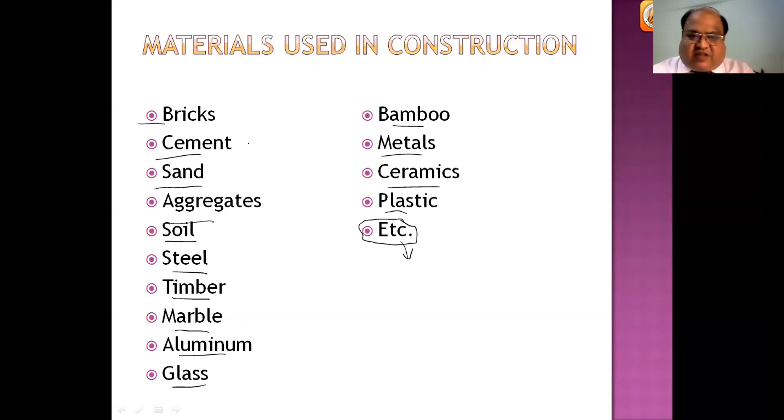So you can see, if I talk about these general building materials, they have certain properties which they should have. Like they should have good mechanical properties, physical properties, mechanical properties, such as strength and hardness.

Elasticity, plasticity, ductility, brittleness. Now, brittleness and ductility are two different properties, but in certain places you require ductility, and in certain places brittleness is important. So also stiffness, flexibility, toughness.

Vibration resistance. So these are the list of properties that should be there in materials, but not all materials have all properties. Certain physical properties are density, bulk density, density index, specific weight, specific gravity, true or absolute specific gravity, apparent or mass specific gravity, porosity.

Hygroscopicity, and water permeability. So we are talking about engineering first of all. Civil engineering is dealing not only with buildings, but also with bridges, dams, and other high-rise structures. That's why various types of materials are being used here.

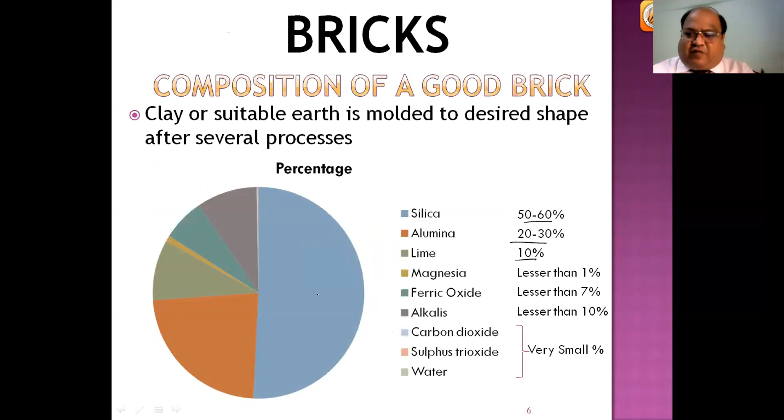If I talk about brick, you can see here the composition of a brick, showing the amount of materials available in it. It depends on how much different types of materials are there in the brick, and brick is also classified into various classes depending on various parameters.

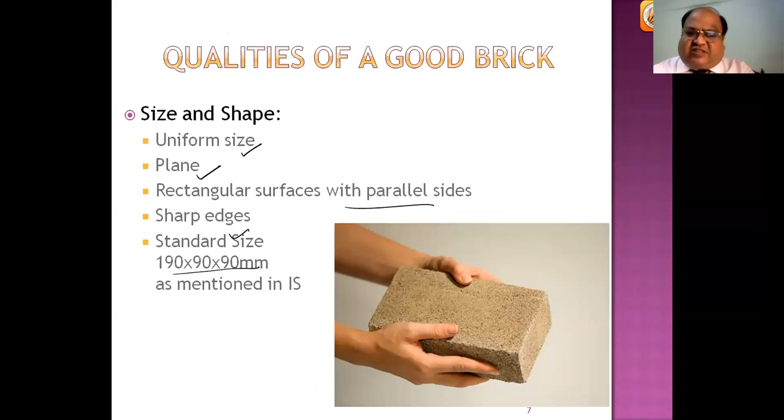A brick should have a uniform size, so it should be plane. It should have rectangular surfaces with parallel sides. It should have sharp edges. It should have a standard size. Generally we use it as per Indian standard code, but in general the size of brick is also different.

So if you see here, these are some general characteristics. When you, as a layperson, go to buy a brick, what will you check? You'll first see the color of the brick - it should be uniform red and/or cherry in color.

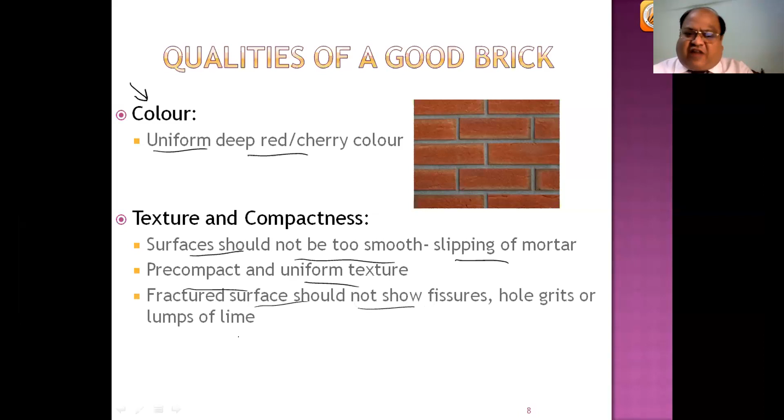Then, what is the texture and compactness of the brick? The surface should not be too smooth or slippery for mortar. It should be compacted with a uniform texture. The fractured surface should not show fissures, holes, grits, or lumps of lime. Okay, so another thing you can test at site is the hardness.

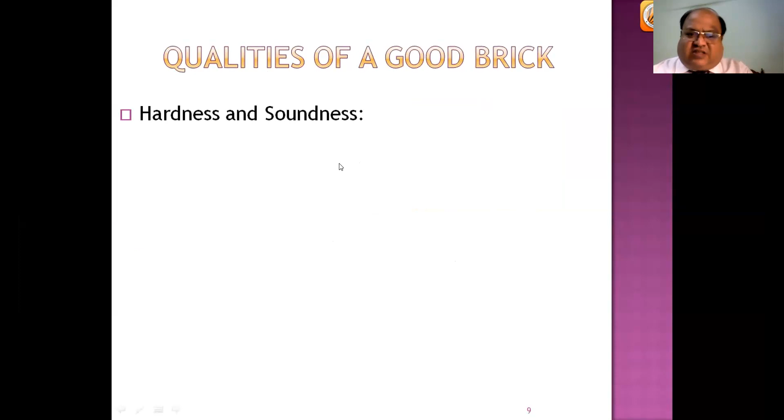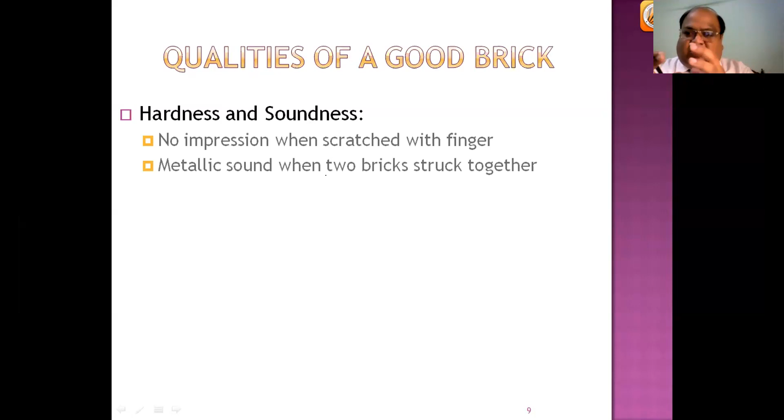You can check the hardness and soundness of the brick. There should be no impression when you scratch your finger over it. So this you can do when you go to buy a brick for your home: take a brick in your hand, see its appearance from outside, and then scratch your finger over the brick. If an impression is coming over the brick, then it is not good. Also, when you strike two bricks together, it should have a metallic sound.

Then what is water absorption? This is not possible for you to check when you go to the mill to buy a brick, so you can do this test at some testing agency. The brick should not take more than 20% of its dry weight in water. Then crushing strength of the brick, it should not be less than 10 Newton per mm square, which we call megapascal. Then brick earth should be free from stones, kankars, organic matter, and other saltpetre. Saltpetre will actually create a white surface over the brick, which is not good.

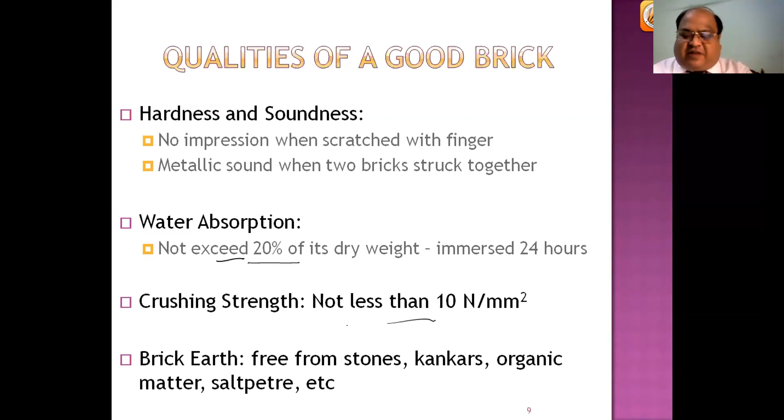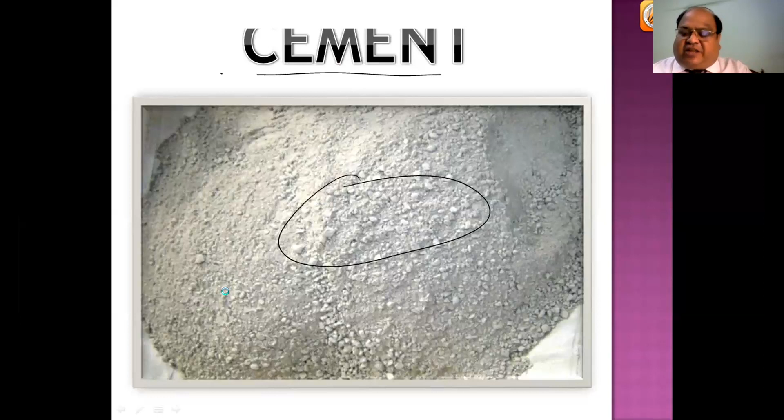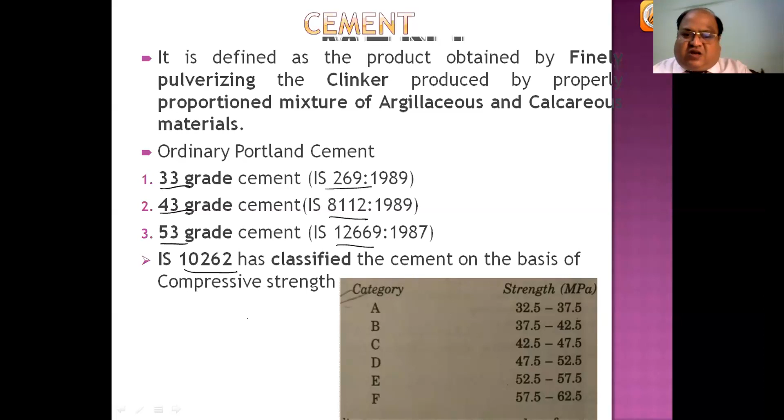So the next material is cement. Cement is grayish in color. You might have seen cement in day-to-day life, but cement has a big engineering behind it. Cement is available in 3 grades in the market. Ordinary Portland cement is there, and pozzolanic Portland cement is also available. There are specific codes by which we design our mix design; we prepare our concrete mix, and cement is also conforming to various IS codes. There are various types of cement.

Civil engineering is a big, vast field - if I talk about cement only, so many types of cement are available. Rapid hardening Portland cement is there. It has high strength and achieves initial strength quickly. Rapid hardening means the structure hardens rapidly so that further work progress can increase. But it depends upon the site and the requirement.

Now we are having low heat cement. This cement is good for mass construction, because when we do concreting, cement reacts with water and a certain heat of hydration is involved. That heat of hydration can be problematic for structures. So for mass constructions like dam construction, we can use low heat cement.

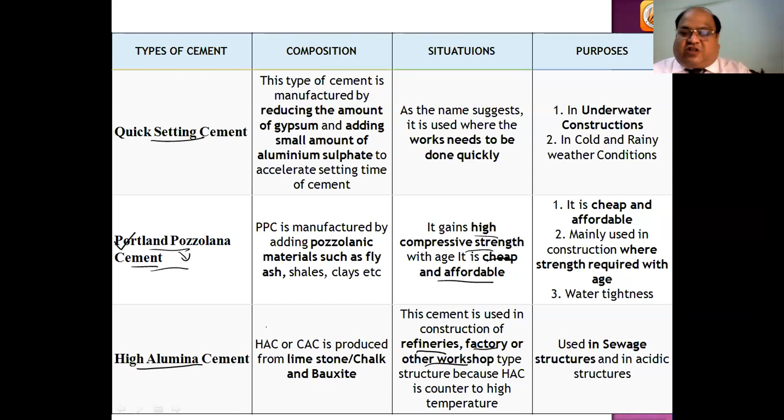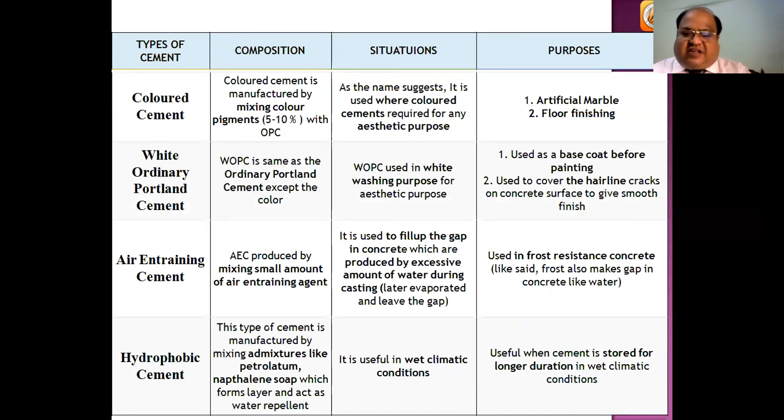There are other types of cement too: colored cement is there, white ordinary Portland cement which you might have used, air entraining cement, hydrophobic cement, and expansive cement. Expansive cement, as its name suggests, expands and increases in volume when it settles.

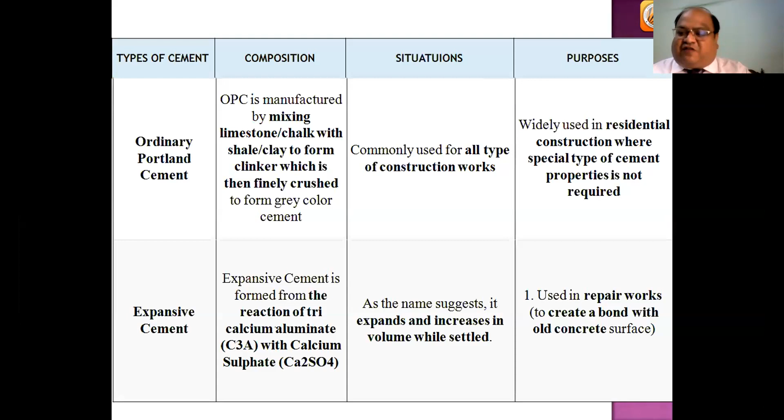For fineness, there is a specific code again. Civil engineering is all dealing with standards. It has standards, specifications, standard processes, standard equipments, which we use to test any material. Like if I'm using cement for testing, we require a specific method to test. We cannot have a contractor testing in one way and another person testing in another way. No, the testing is to be done in a specific process. So our Indian standards, Bureau of Indian Standards, have specified processes as well as standards to test all our materials.

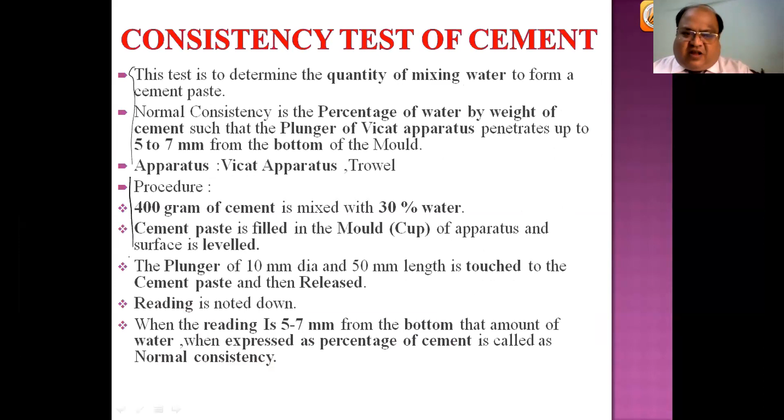These are certain tests which are performed on cement, like the consistency test of cement, and all these processes are given over here as per the Indian standard code.

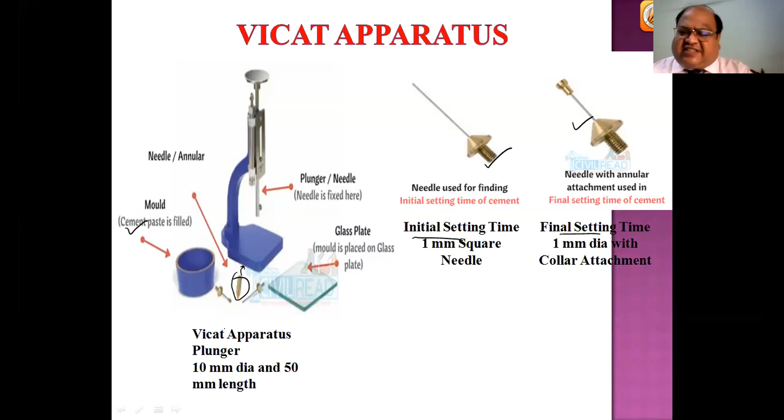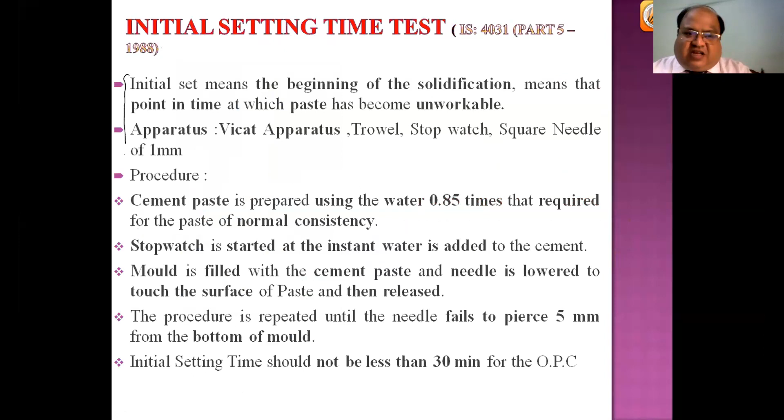Then we use this first plunger needle to check consistency in the cement. Then we use this needle to check initial setting time, and the final needle is used to check final setting time. The next type of test is the process of it. Initial setting time is listed here, final setting time is listed here.

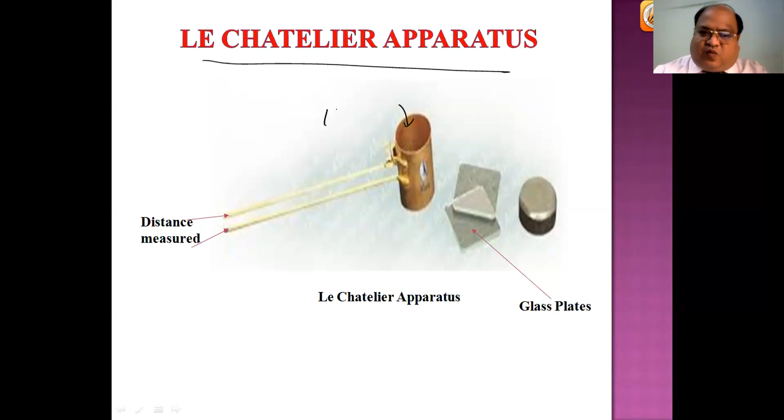Yeah, okay, let us move further. This instrument we use to do the soundness test, where we fill this, and then we put these glass plates up and bottom to it, and then we put this into a water bath, and then it is cured for 1 day. 1 day it is cured, 24 hours, and then when we bring this out, we boil it in boiling water. Before boiling we measure this distance, then after boiling we again measure this distance.

So there will be some expansion. We see the expansion that happened in the cement mold. This gives us an idea of how much cement will expand when it is being heated.

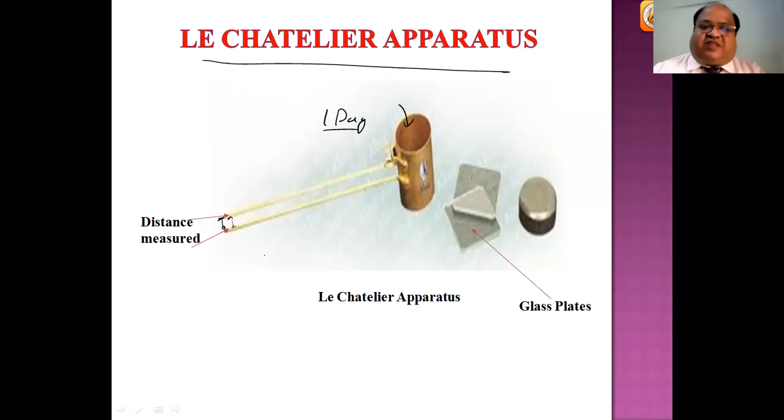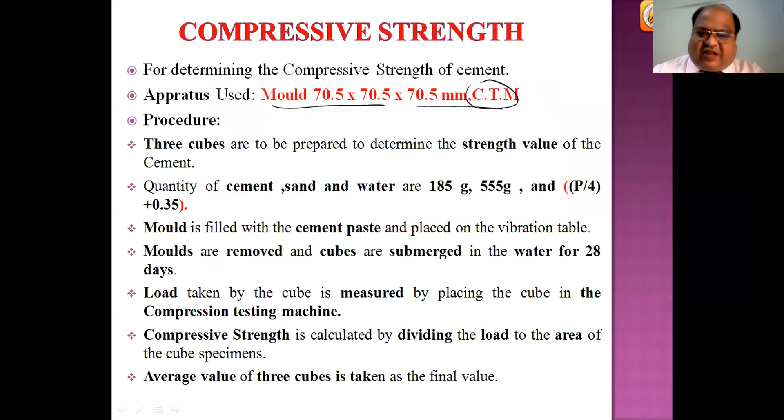So if we talk about concrete, what is concrete? It's a mixture of various materials, but this mixture has full science behind it. So we have to study this concrete in detail in civil engineering, but also we have to study about how and where to place these reinforcements.

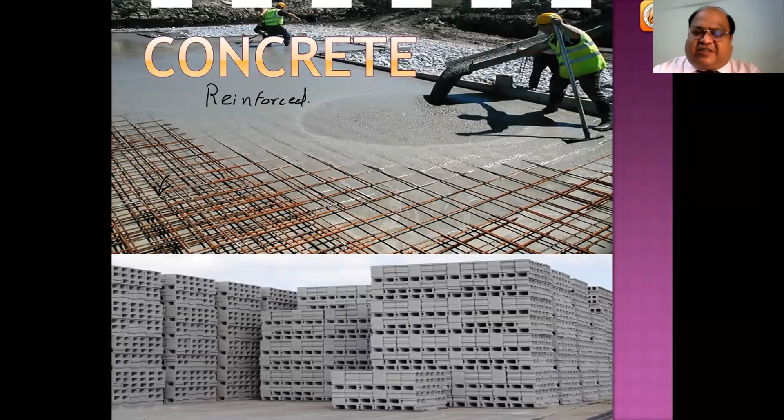If we are placing reinforcement, it is called reinforced concrete. So we have various subjects we study in civil engineering, and we deal with not only reinforced concrete but steel structures also. Let us see what are the different types of concrete first.

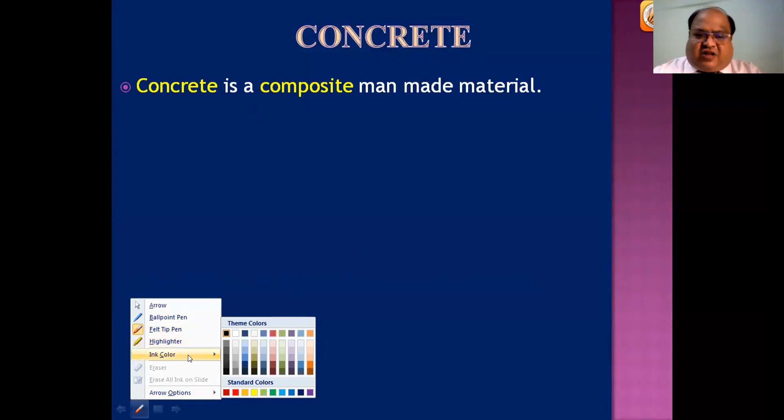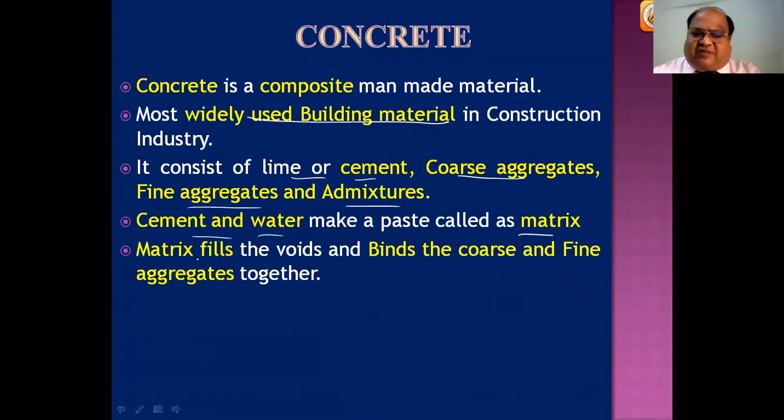What is concrete? Concrete is a composite man-made material. It is the most widely used building material in the construction industry. It consists of lime or cement, coarse aggregates, fine aggregates, and admixtures. Cement and water make a paste which is called matrix. The matrix fills the voids and binds the coarse and fine aggregates together.

Fresh concrete is called wet or green concrete. After setting and hardening, it is called hardened concrete. So you can see a big list of types of concrete here. Normal concrete we use generally, plain ordinary concrete, where no reinforcements are there.

Then your reinforced concrete, which we use in our houses, pre-stressed concrete, a very interesting one. If you have seen bridges being created nowadays, concrete bridges, they used pre-stressed concrete over there. Precast concrete members they bring in, and I can give you a very good example of precast concrete: a 30-story building was created within 13 days, and that's a world record, in China.

Lightweight concrete is also there, high density concrete, air entrained concrete, ready mix concrete, polymer concrete, high strength concrete.

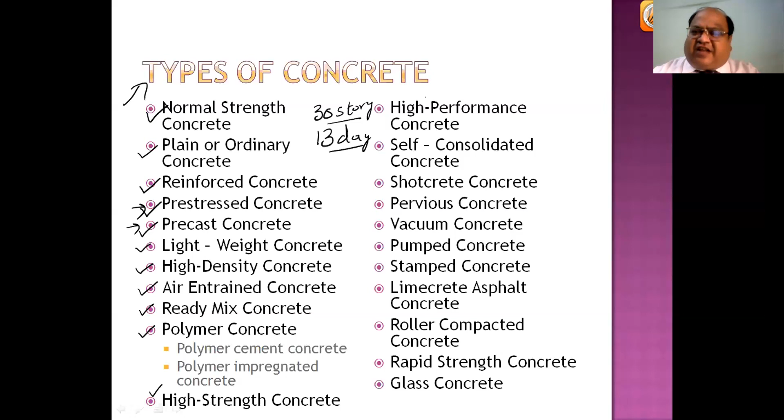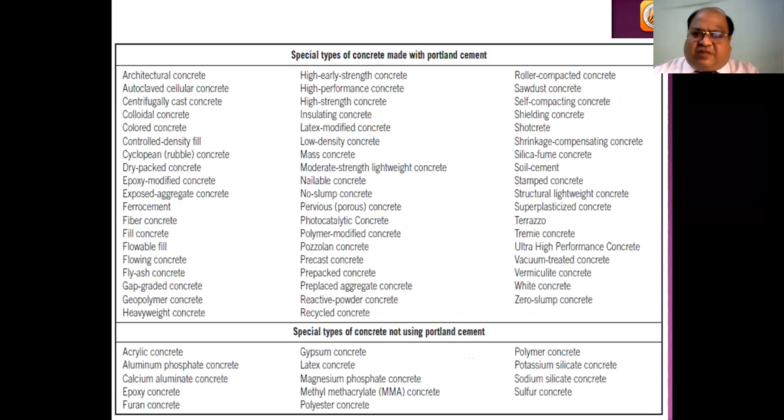By names, I think, you will not be able to understand better, so I have some pictures to show you today. These are many types of concrete which are being used, using Portland cement, and then without using Portland cement also concrete is there. So let me show you certain pictures.

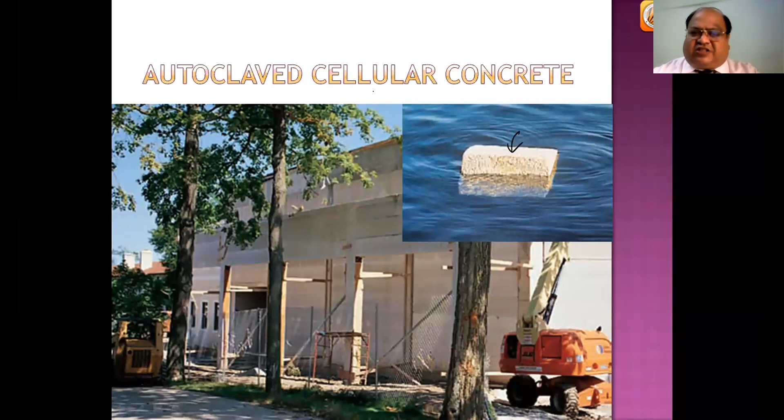You can see here structural lightweight aggregate concrete, where these type of specific aggregates, called LECA aggregates, are used to create this concrete. It is light in weight, and you can see a block of concrete floating over water. So in places where tsunami or flood problems are there, we can use this lightweight concrete. It's also named autoclaved cellular concrete, and it can float over water.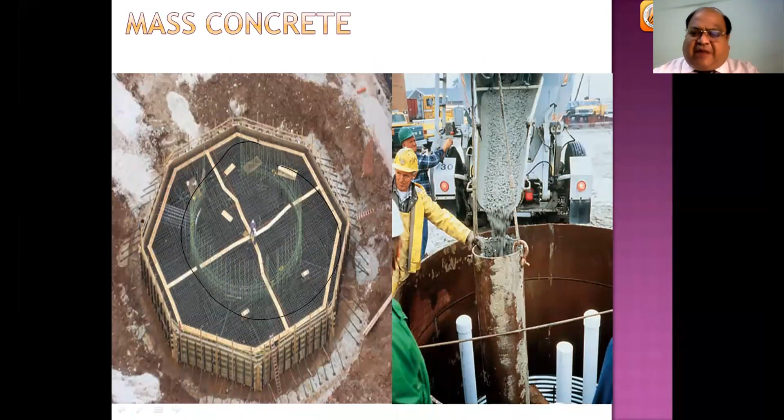This is mass concreting. You can see a big foundation here, it's a chimney foundation, and mass concreting is done by this tremie pipe. We use tremie pipes for pile foundations.

Then we are having roller compacted concrete. Below, this concrete is being rolled by the roller, so it is called roller compacted concrete. It's having very less workability, less water, and we can roll it to create a pavement.

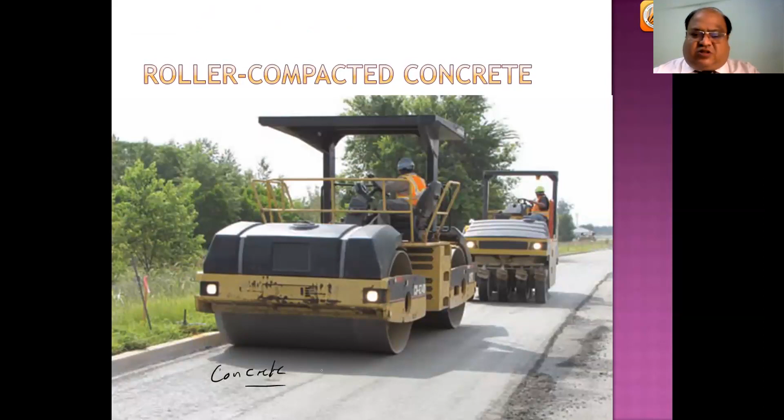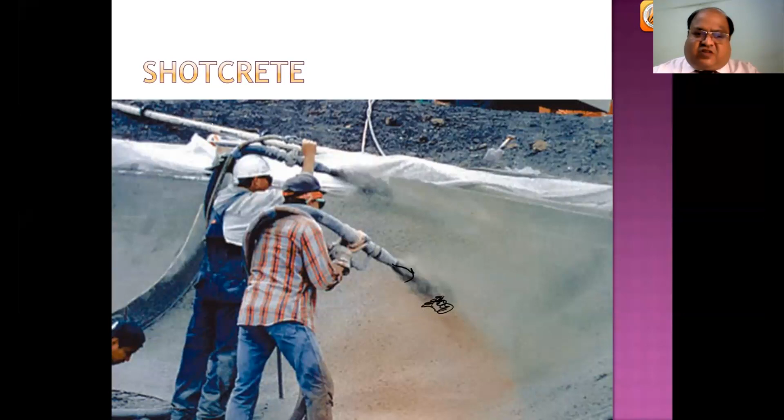Next, shotcrete, very interesting. You can see this pump is pumping the concrete here on this wall, and as soon as it comes over here, it converts to solid form, meaning it is not flowing. That's called shotcrete. It is rapid hardening concrete.

Next is pervious concrete, a very nice and interesting technology advancement. You can see the problems of floods or roads filled with water can be tackled nowadays by this. Many countries are using it, including India. They are making pavements or roads with this concrete. Now what happens if we create roads with this? The water coming from rain will go down to the lower strata, and then down to the groundwater. But no doubt, if good things are there, some problems can also be associated, like the durability of this concrete is still questionable, and people are still doing research. So everywhere you can find a research gap, and you can work on it.

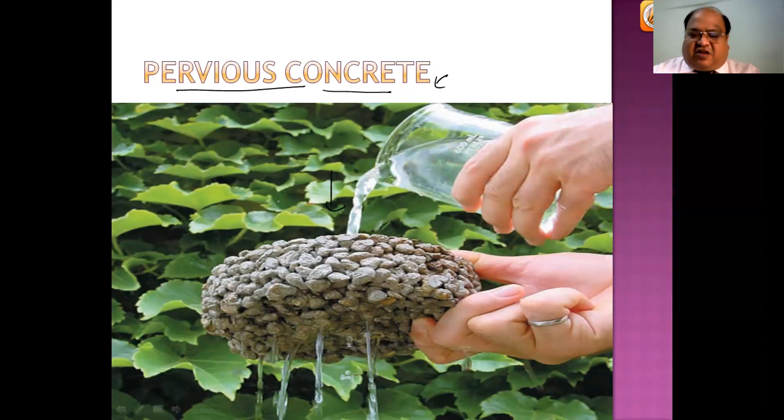One step higher, you can see colored concrete. Previously, I showed you white concrete, now this is colored concrete. So colored concrete is having different colors.

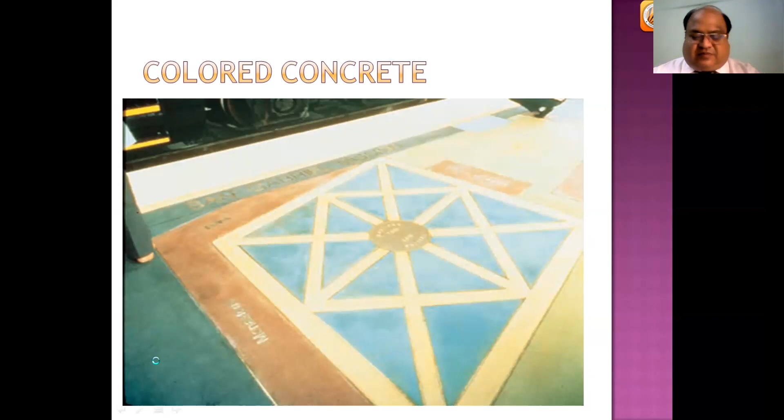Next one, photocatalytic concrete. Till now, we were discussing the texture of the concrete, but this is the latest example and a good research which can turn our buildings to help us for the environment. Now, how does this work?

This photocatalytic concrete is using certain titanium-based compounds. Titanium oxides are there, there are actually two oxides, TiO and TiO2. This titanium oxide, if we put in the concrete, is also available in two forms, active and passive. So we have to take active titanium oxide and we have to either cast it in the concrete itself,

or place it as a powder over the concrete. So what happens then? This concrete will reduce pollution. How? It reduces NO2 gases, NO2 particles from the environment. It is reactive with NO2 particles. You can see in this picture, when UV rays come to this concrete, they take the NO and NO2 particles and convert them to NO3 particles, which can then be collected in the form of powder. It falls down in the form of powder as pollution, and can be collected and thrown away. So it reduces the pollution.

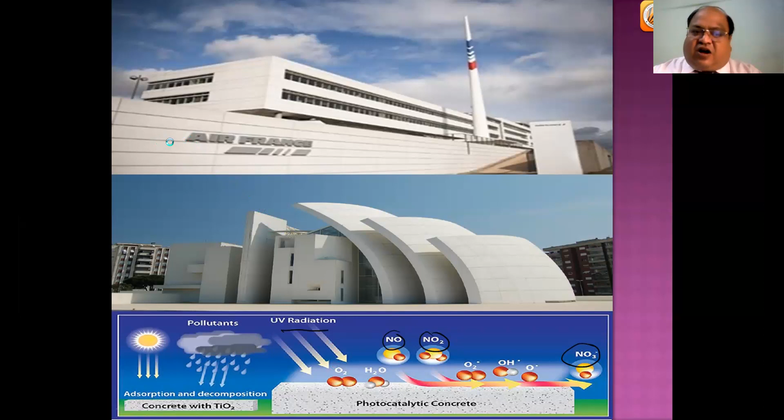You can see here, it is being used at Air France, at the airport of France. This is another building example where this type of concrete is being used.

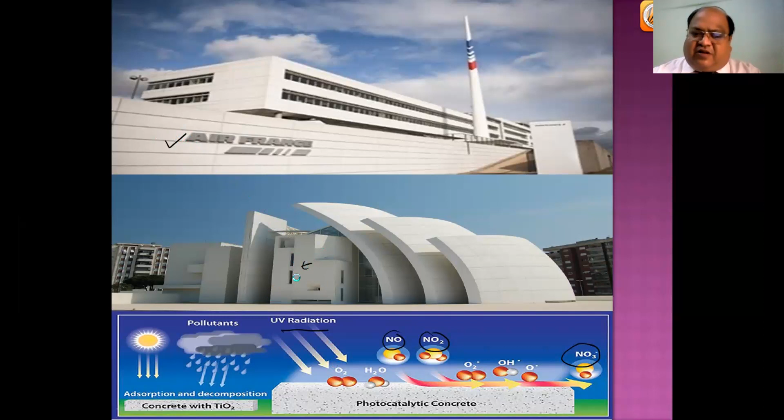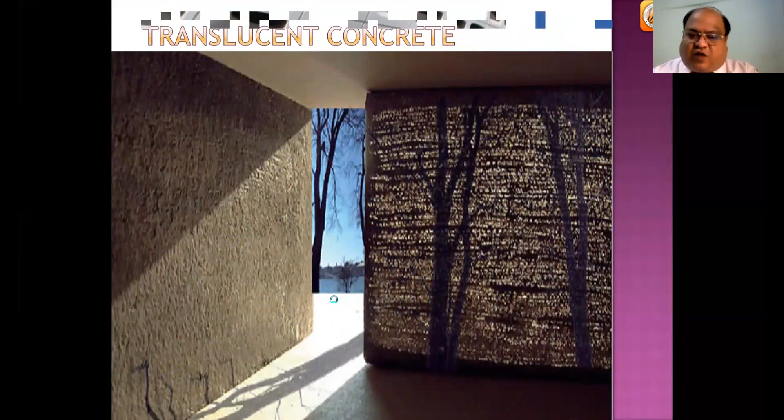Okay, so this is glass fiber reinforced concrete. So many types of concrete are coming in this world. Next, translucent concrete. This is a new concept, and people are working on it, and yes, it has happened now. So this concrete is also available. You can see here, what they are using is optical fibers in it. So you can see here, light is passing through the concrete.

Concrete till now was opaque, but now light is passing through, so we can have better looking structures. And what it can help us with is reducing the requirement of electricity. How? By letting outside sun rays come inside, so we need less electrical equipment to light our room. Okay, so this type of concrete is being created nowadays.

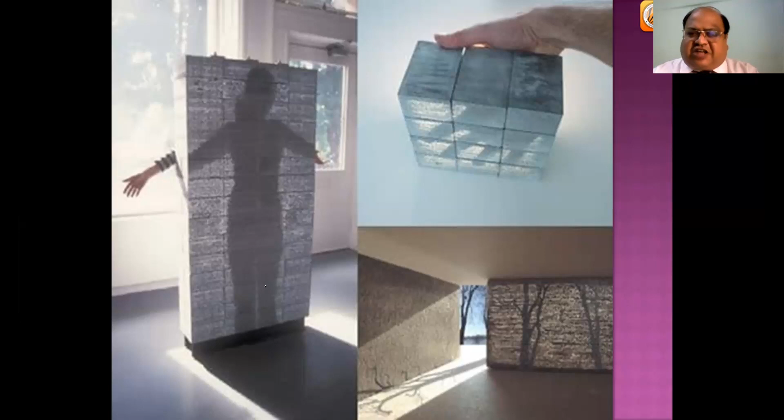If I talk about technology in the construction industry, one basic requirement is the machinery. So machinery also is being improved nowadays. If you talk about the olden days, that time we used to mix our material manually.

If I talk about Egypt, they used to create a pond and fill that pond with material, then mix that material, and then transfer it using various ramps and other resources, like chain pulley systems, or they used to use animals to take all the materials up.

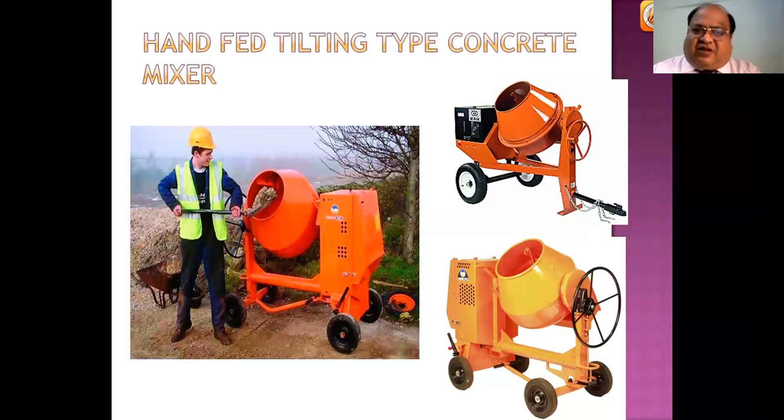But nowadays we have a good number of equipments available, and we can do fast construction. You can see in certain pictures, this is a hand fed concrete mixer, which is an older one.

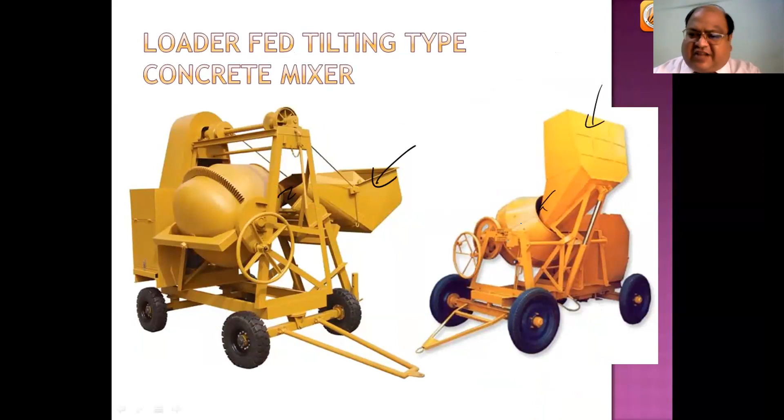Now you can see here, after that, it has this particular loader fed arrangement. We can put our material here, in this bucket, and it puts that material inside it. So the use of manpower here has been reduced.

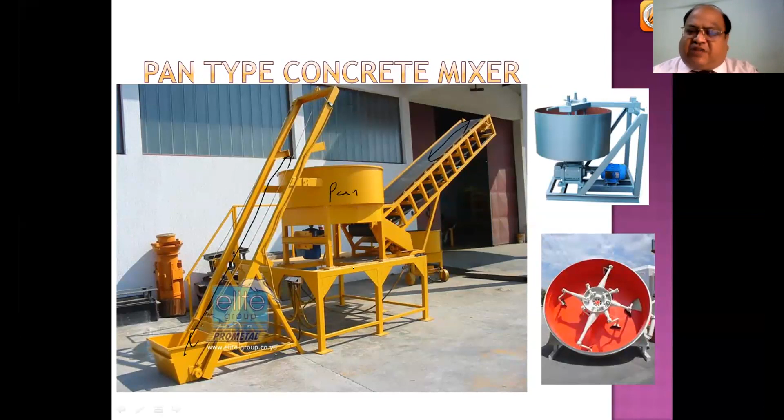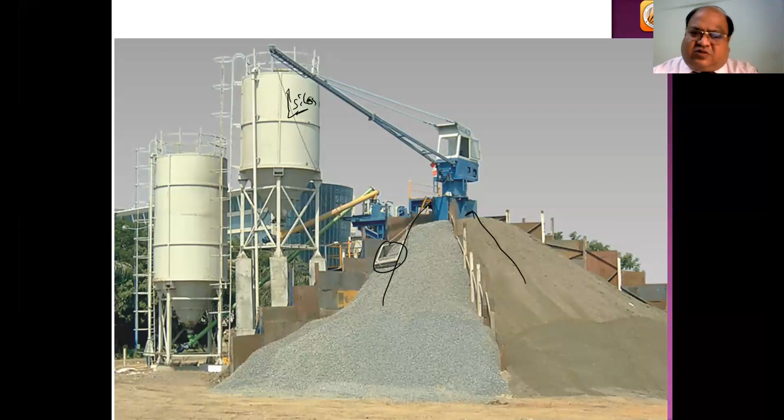Now I'll show you certain big plants, batching plants. You can see this batching plant, we call it an RMC plant. You can see this chain pulley, it will take the material to the desired position where it can be mixed. And you can see here these silos, which are being used to store cement or admixtures.

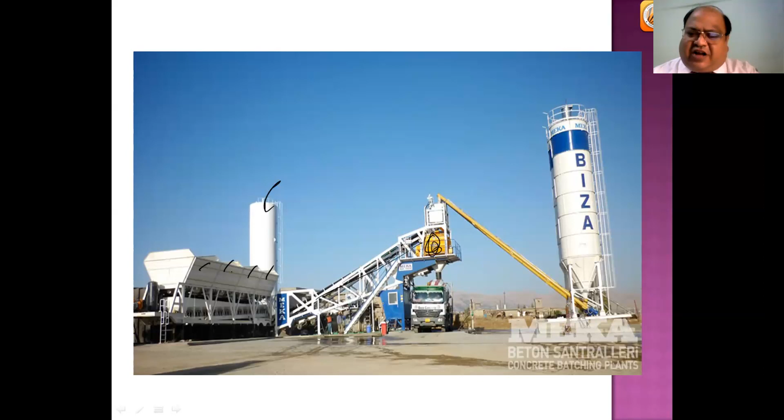You can see another type of batching plant. You can see these buckets where we can put different types of material like coarse aggregate, fine aggregate, or more finer aggregate, some admixtures. If you fill this silo with cement, then with this conveyor belt these materials will go up, here it will be mixed, and then the concrete can be taken from this truck to the places where it is required.

Here we will put the material. Material will be taken up by this conveyor belt, coming into this hopper, and this hopper will take it up into the mixer, and then the mixer is taking this concrete into the transit mixer. This truck is called a transit mixer truck.

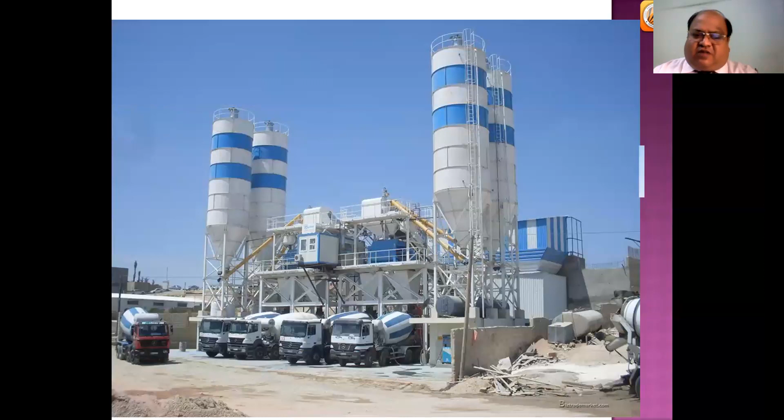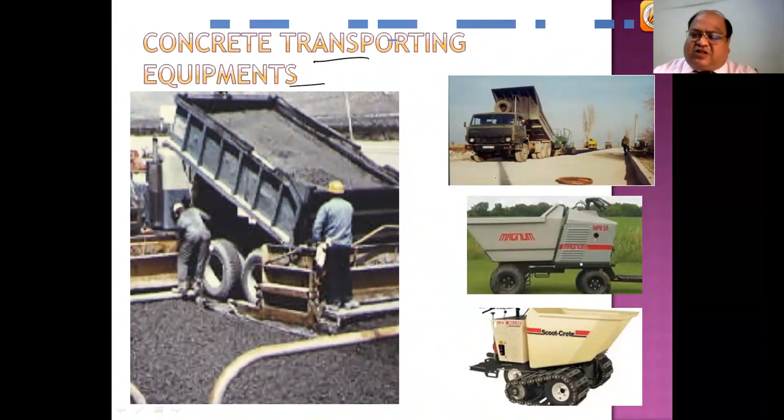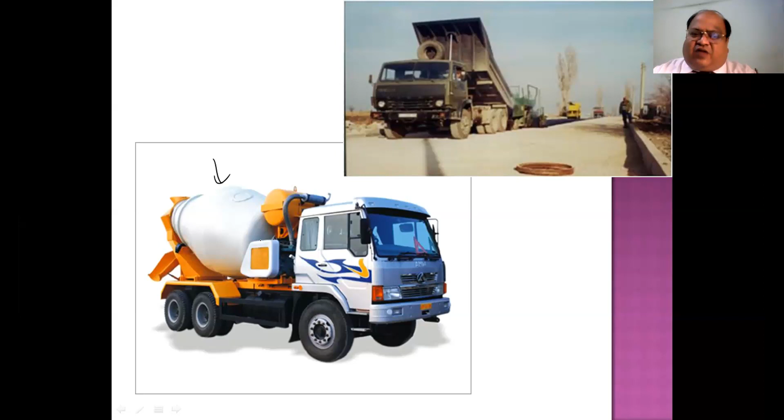Now, if I talk about concrete transporting equipments, these are some older equipments which are being used. A truck is being used, which can be opened from the back, with some hydraulic jack in it. But nowadays we are using these type of trucks, which have a roller at the back. This roller is there, it used to mix the concrete as well, so it will not allow the concrete to settle down. Why? Because if the concrete settles down in the truck itself, it will reduce its strength.

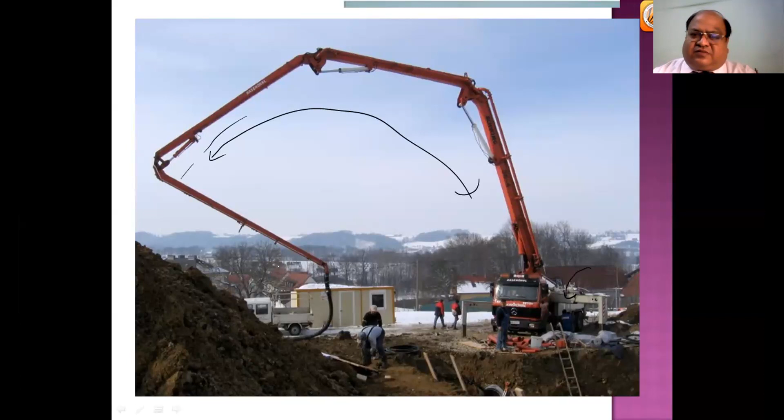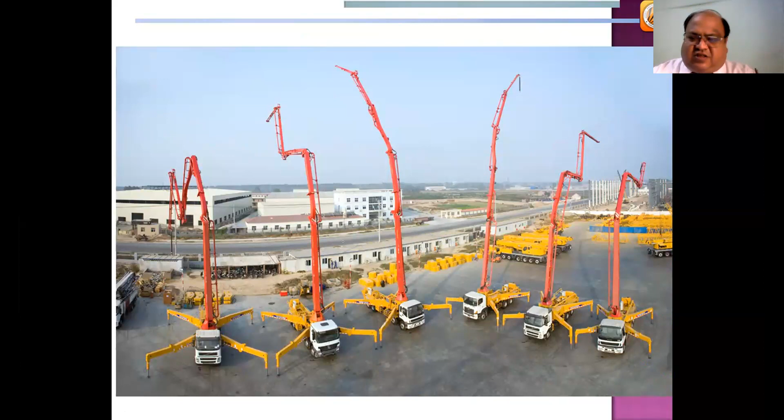You can see, instead of concrete pump, nowadays we are using this machinery. It has this boom, and you can see I can place the concrete here in it. It can pump through this boom and then place it to its position. So another view of these type of machineries where we can use it in concreting.

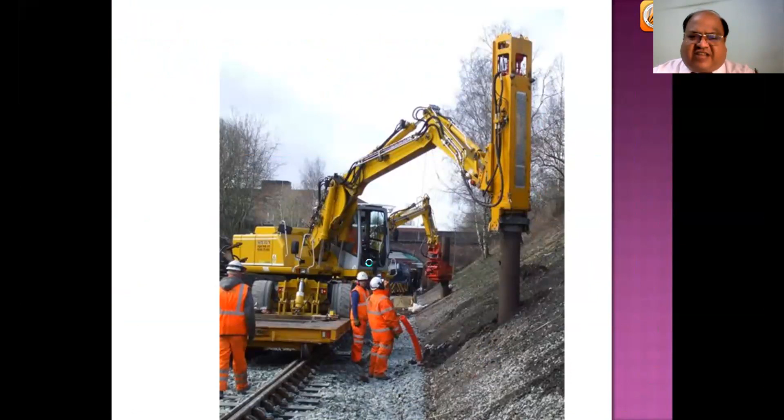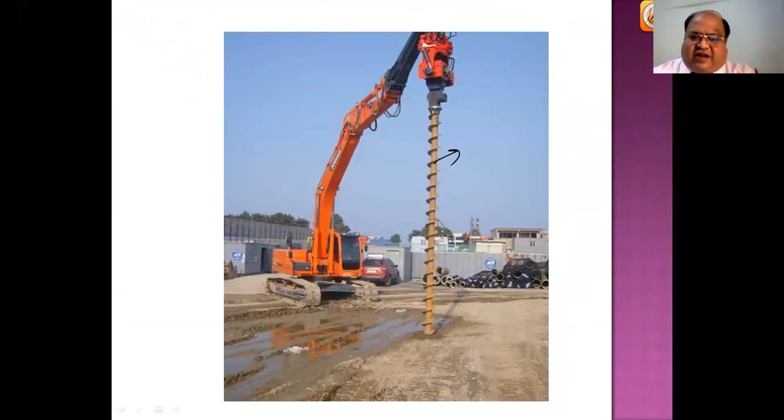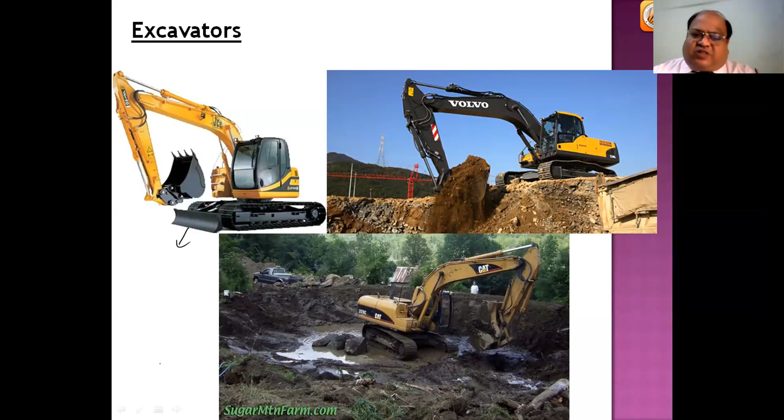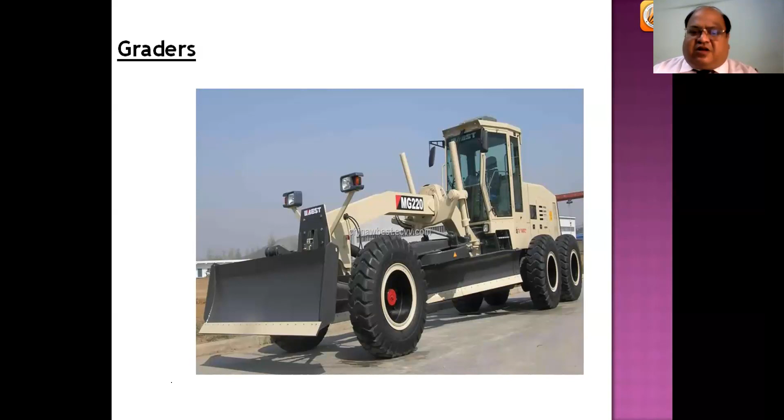If we talk about pavement construction, when these type of graders are not there, we use more laborers to grade our lands to a proper level, and we have to provide certain camber also. But now we have these type of graders available, which can reduce the number of laborers required and the time required for construction. So new equipments are coming in nowadays. This is a very common one, JCB.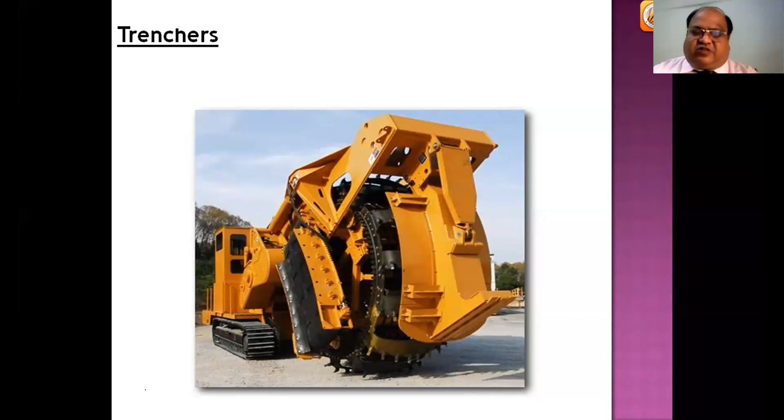Trenchers. Now to create a trench, these are the new equipments being used nowadays. Instead of making a trench using a JCB and then making the lines of the trench using labor, we can use this equipment to create trenches.

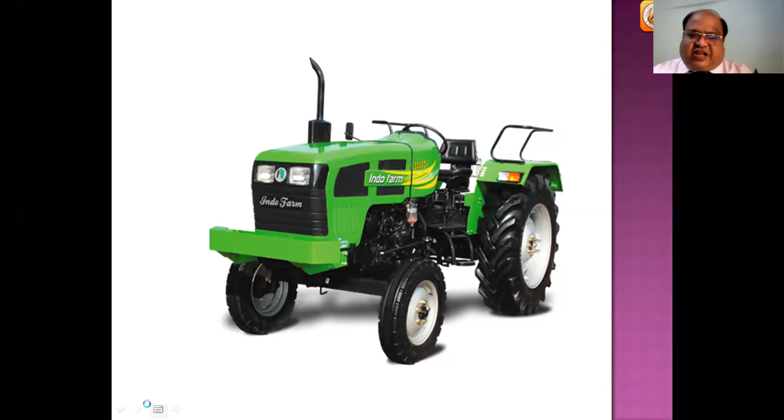Now where do we use this clamshell? In oceans, we used to bring some boulders up, or we used to clean some reservoirs back, in the dams. If I show you with a diagram, this is a dam, this is a reservoir back. The silt particles and some unwanted materials line up over here on the dam back and provide pressure to the dam, which can be problematic later on.

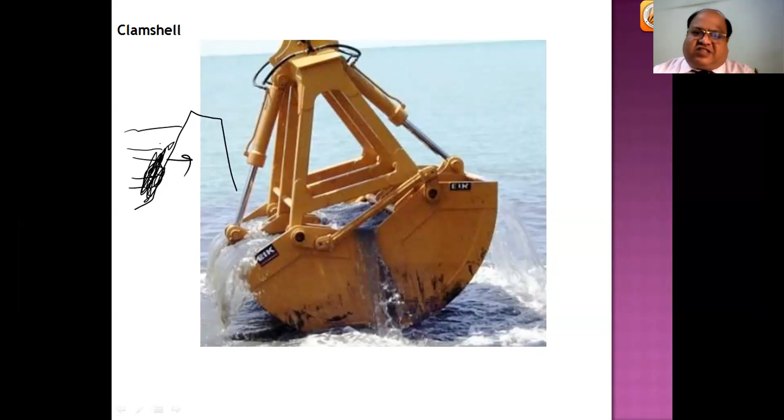It can reduce the dam stability and create problems for the dam. So what we do is use these clamshells and remove this material from here. It's also used in oceans to remove materials, debris. You can see here some other pictures.

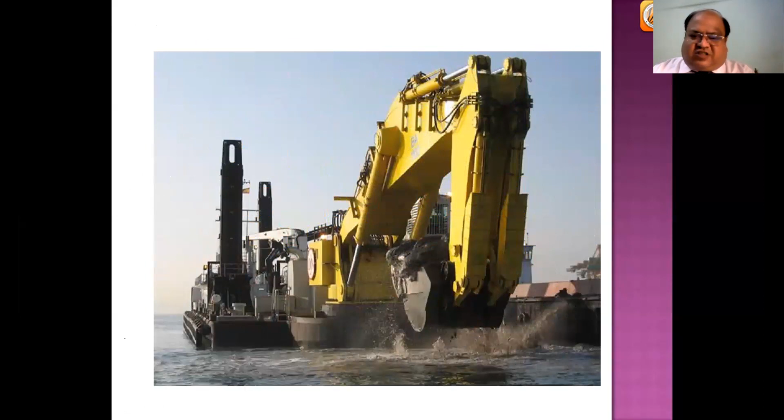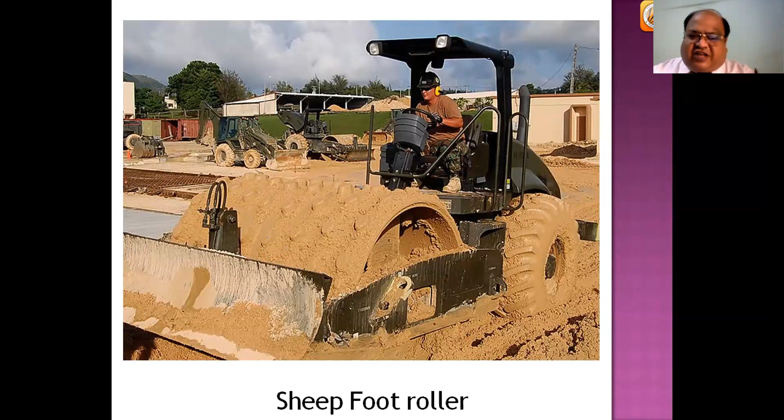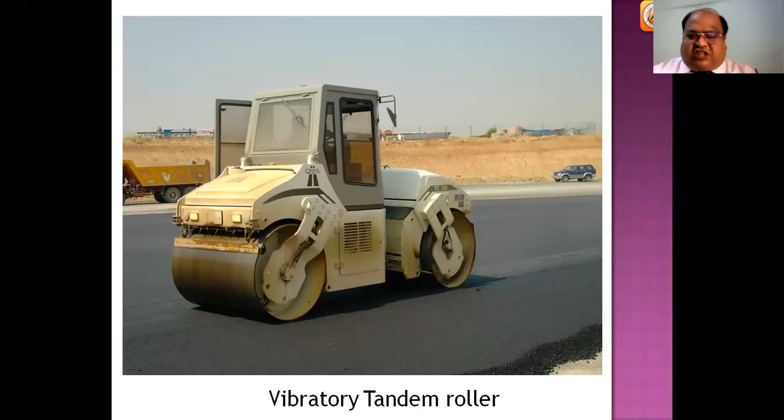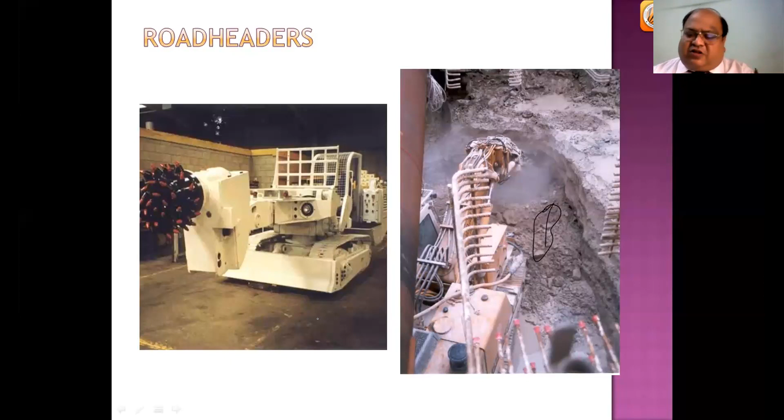But the problem has been resolved. We are using tunnel boring machines nowadays, class, so it can do all the work together in one go. It can do blasting, it can remove the muck also, it can provide the tunnel lining also. So it keeps on moving and the things are being done simultaneously in it. This is called a tunnel boring machine.

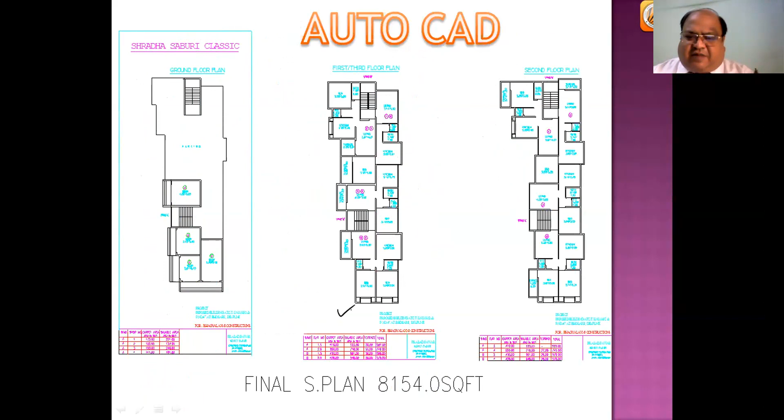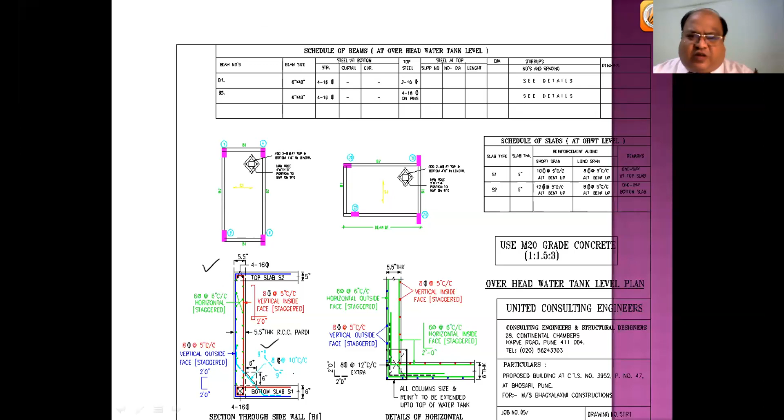I'll show you some pictures of the software. You can see we can create structures like this. This is a plan of a building. See the steel reinforcements are being shown here using AutoCAD. Then certain other plans, reinforcement detailings are being shown here, and 3D structures we can create.

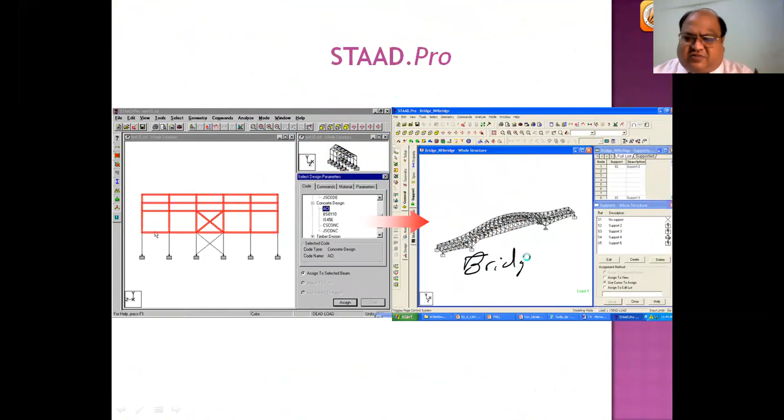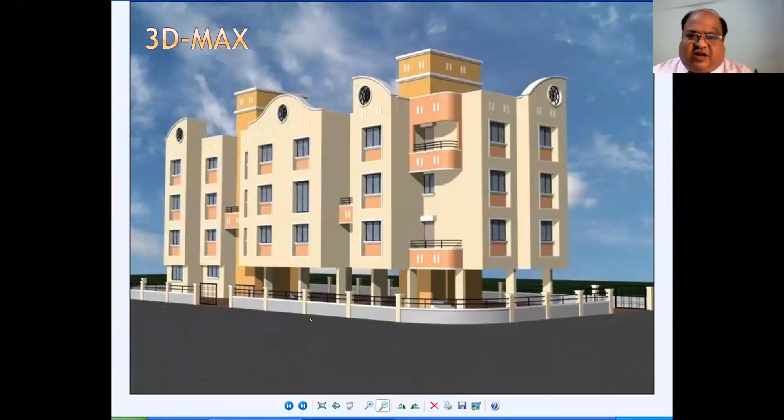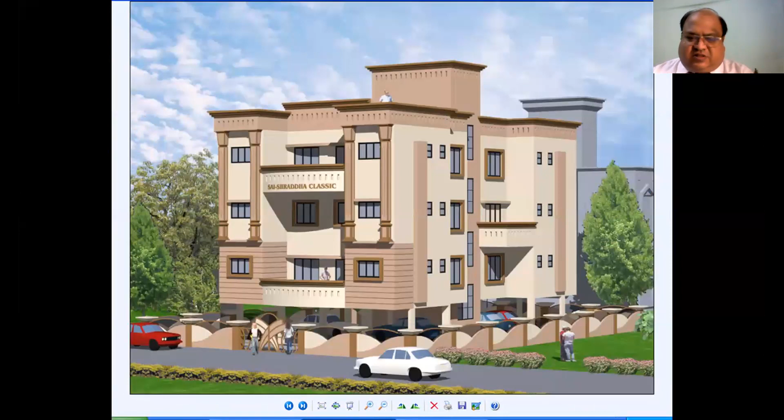So with this, the purpose of today's presentation was to tell you that civil engineering is not only about cement, soil, and aggregates. It's an engineering where many things are there to study and to learn.

Any questions if you're having?

Sir, thank you so much, first of all, for giving this valuable presentation to us, to all the attendees, and for crediting your time and explaining what different aspects we can have in terms of civil engineering. Related to that, we have one question. So with your permission, can I take up? Yeah sure, ma'am. There's one student named Radha. She just wants to know, civil engineers can be architects and vice versa, but what more?

Okay Radha, I would like to answer you this. There are two different fields if we talk about architecture and civil engineering. Architecture deals with the plan of a house, how it should look like, what should be the materials used to create that house. But when we talk about strength of the material, an architect can no doubt use a material, but he cannot say what should be the strength of that material, because if you are making a column or a beam or a structure which requires a heavy material with more strength, but you are not providing that particular material to it, that structure will fall down. So we have to check the strength of the material.